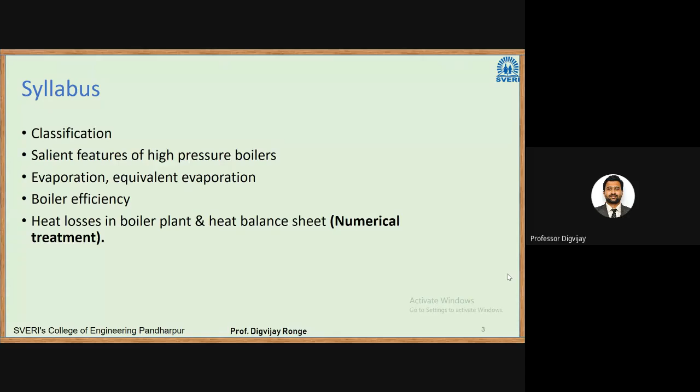So that was about the certification about the boiler attendant or boiler technician.

Okay, now we'll start the chapter. First I will introduce the boilers. The two important areas of application of thermodynamics are power generation and refrigeration. Whenever I say thermodynamics, there will be two things involved: either power generation or refrigeration. Both are usually accomplished by a system that operates on a thermodynamic cycle. For power generation, steam is essential, and in some cases of refrigeration also steam is required.

Air conditioning is not only limited to cooling, it also involves heating. In European countries, the temperature is very low, so they refer to it as a heating system. In that case, they use steam for heating the indoor environment.

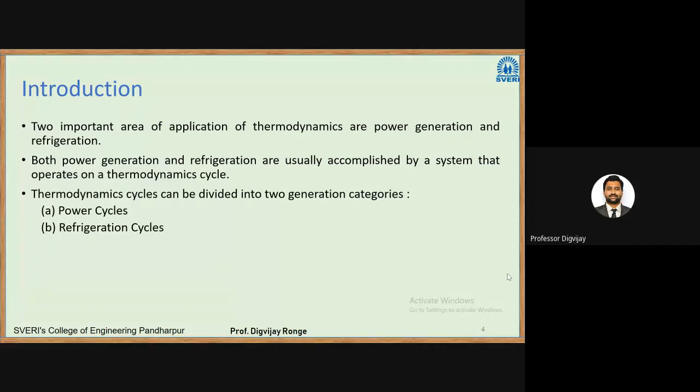Thermodynamic cycles can be divided into two generation categories, depending on the application. If I'm talking about power cycles, we start with the Carnot cycle, which gives maximum efficiency. Then we have the Otto cycle, the diesel cycle, and the Rankine cycle. Second, depending on application, if I'm going with refrigeration, then I have refrigeration cycles - vapor compression cycle, vapor absorption cycle.

So various thermodynamic cycles are involved in refrigeration also.

The devices or systems used to produce a net power output are often called engines. So you are now dealing with the chapter called IC engines. An engine is nothing but a heat engine. You also studied the first law or the second law - the heat engine is nothing but it takes heat from a high temperature source, converts some part of it into useful work, and the rest is termed as heat loss, released to the sink, the low temperature sink.

So devices or systems used to produce a net power output are often called engines. As mechanical engineers, we always deal with engines and refrigerators, and the thermodynamic cycles they operate on are called power cycles - this can be the Carnot cycle, Otto cycle, or diesel cycle. Various cycles exist for power cycles. Next, the devices or systems used to produce refrigeration are called refrigerators, air conditioners, or heat pumps, and the cycles they operate on are called refrigeration cycles.

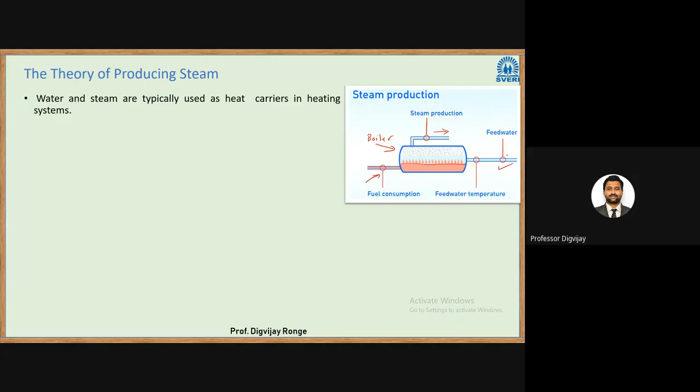Water and steam are typically used as heat carriers in heating systems. It is well known that water boils and evaporates at 100 degrees Celsius under atmospheric pressure, which roughly I will take as 1 bar. So if I boil water under 1 bar pressure, it will be evaporated, or boiled, or converted into steam at 100 degrees Celsius.

Next point: at higher pressure, water evaporates at a higher temperature. For example, a pressure of 10 bar equals an evaporation temperature of 184. What it means is, if I keep the volume constant, pressure will be directly proportional to the temperature. So if I increase the pressure, its evaporation temperature, that is Tsat, will also increase.

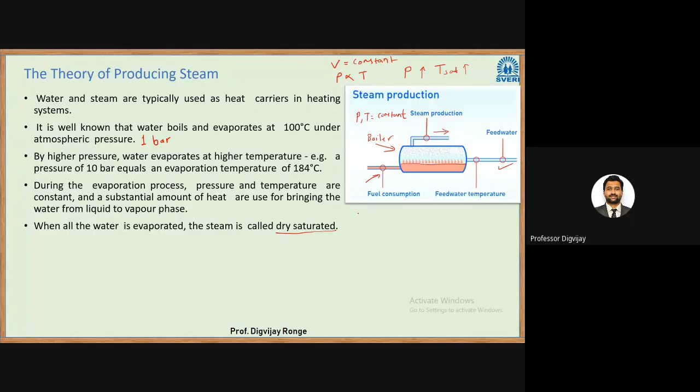So when all the water is evaporated, the steam is called dry saturated. Those who are regular in these lectures, who have attended from the second chapter, can easily identify this situation of dry saturation.

Quickly I will draw this diagram for temperature versus entropy, the diagram for phase change. If I start with liquid and increase its temperature, its entropy will also increase, and at one point I reach the T saturation or saturation temperature. At this point, phase change takes place at constant temperature. This is nothing but the latent heat of evaporation or vaporization. It comes to a point here. At this point, dryness fraction is 0, and here, dryness fraction is 1.

From this point onwards, this situation is referred to as dry saturated. This whole horizontal line is the saturation line. But if you are standing here, this is dry saturated, and this we simply call saturated, or we also call it liquid saturated. From this point onwards, it is converted into dry steam, and now the steam's temperature will again rise. This is the phase change diagram for steam.

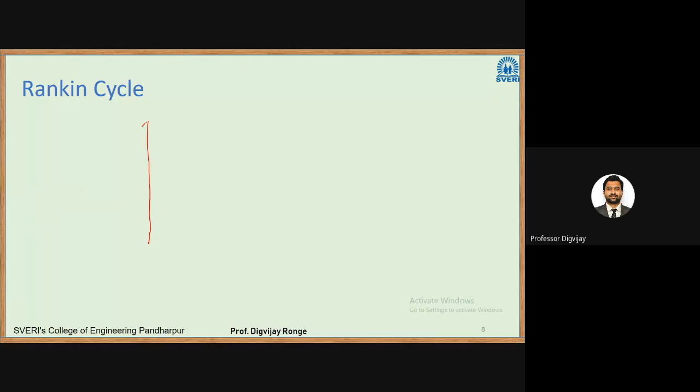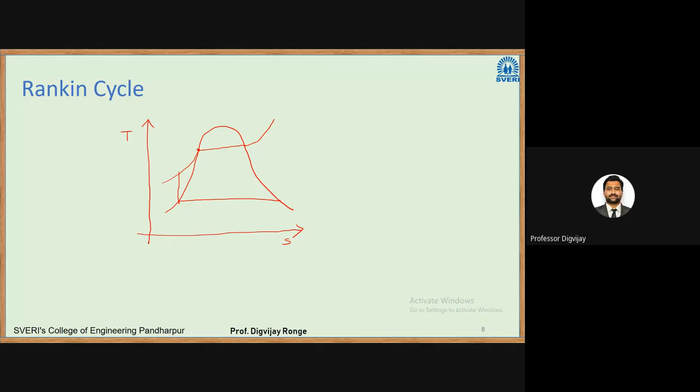If I draw temperature versus entropy, it will look like this. So this is a Rankine cycle here.

This is the 1 to 2 process. Actually, there are two pressures involved: lower is the condenser pressure, higher is the boiler pressure. This pressure is increased with the help of a pump, so this is a pump. 1 to 2 is a pump process. 2 to 3 is a boiler process.

Inside the boiler, first the temperature is increased up to the saturation temperature. Latent heat is added, then it is converted into dry saturated steam. Afterward, it is converted into superheated steam. This is the boiler process, 2 to 3. Next, from 3 to 4, it is an expansion process inside the turbine.

This is an expansion process, a reversible adiabatic process. That is why it is a constant entropy process. Again, 3 to 4, here it is the turbine.

Inside the turbine, work is being produced. Again, 4 to 1 is here the condensation, which takes place inside the condenser. So this is the Rankine cycle.

There will be some numericals for you in chapter 4, that is the vapor power cycle. So draw it.

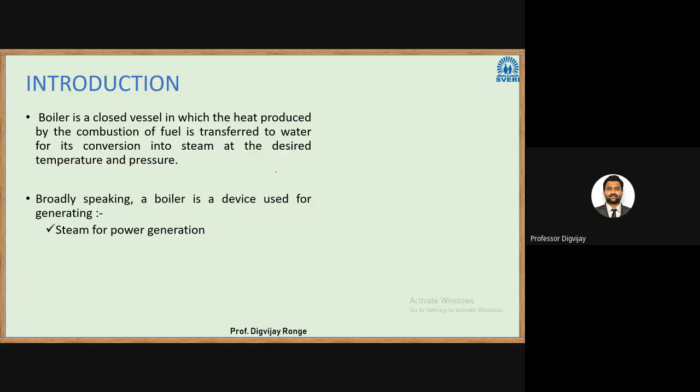water for its conversion into steam at the desired temperature and pressure. I want you to write down this definition. It's very important; it covers all the aspects of the boiler. Boiler is a closed vessel in which the heat produced by the combustion of fuel is transferred to water for its conversion into steam at the desired temperature and pressure.

This term is very important: at the desired temperature and pressure. This desired temperature and pressure will be decided by the power plant engineer, that is, how much pressure should be there inside the boiler and what is the outlet temperature of the steam coming from the boiler.

Broadly speaking, the boiler is a device used for generating, first, steam for power generation. So that is the basic purpose. Boiler is used for steam for power generation. Second, hot water for heating purpose.

Now next, this slide gives you an idea about the applications of steam boilers. First one here, agriculture, then animal food industry, bakeries, ceramic industry, dairies,

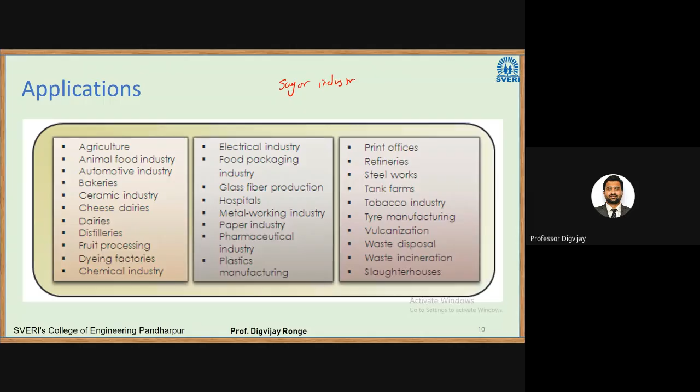And thermal power stations. In both cases, we are using boilers. So if you get a chance to visit nearby sugar industries, please go and watch for boilers. There, the technician will explain how that boiler works or how it is being utilized.

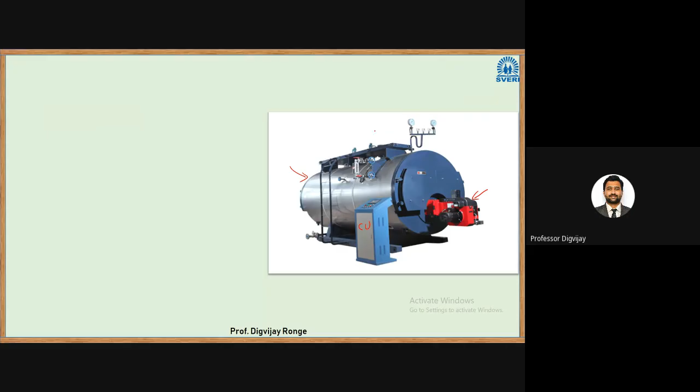So what are the primary requirements of the boiler? The primary requirements of steam generators or boilers are: the water must be contained safely. That means water inlet and water circulation inside the boiler should be contained safely. There should not be any mixing of water with the fire or the combustion part; they should not be mixed together. Then the steam must be delivered safely in the desired condition as regards its pressure, temperature, quality, and required rate. So that has to be controlled very precisely.

Again, the material used for the construction of the boiler should withstand that pressure, right? If it fails to withstand that pressure, it may explode and that may cause very serious casualty inside the thermal power station. So that was the two major objectives.

Now we'll see how boilers are being classified. Below is the classification of boilers. These may be classified under horizontal boiler, vertical boiler, or inclined boiler, depending on their position. Second is fire tube and water tube boilers. So what is a fire tube boiler? What is a water tube boiler? We'll see that in upcoming slides.

Third is externally fired and internally fired boilers. Externally means the combustion first takes place outside, and that heat is then transferred to the boiler. Internally means, like I showed you in the previous image, in that shell only there will be fire and inside that only there will be water. So both will be separated.

Then D is forced circulation and natural circulation of boilers. Forced circulation means some velocity will be imparted to the water. Natural circulation means, like we all know, if I take a bucket or some vessel with water inside and start heating it, the hot water near the base will rise up and come to the top. This happens because the density of hot water is less, so it rises, and the cold water settles to the bottom. That way circulation is created, which we refer to as natural circulation.

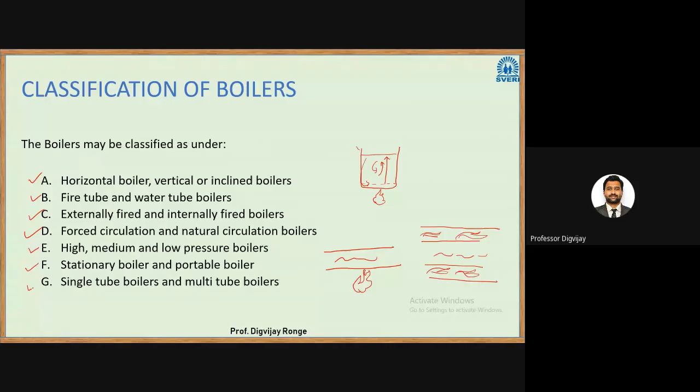First we'll see what is a fire tube boiler. It is a boiler in which the hot flue gases are present inside the tubes and the water surrounds these tubes. As fire is present inside the tubes, hence it is called fire tube boiler.

I will show you the construction, then your idea about this boiler will be more clear. See, there is this image. At the bottom there is a brick structure, made up of brick. Then there is a furnace here where heat is being generated, and to that furnace these tubes are attached.

Inside the tube, this fire or flue gases will flow. These tubes are surrounded by water. Now heat transfer will take place from the tube to the water, then water will be converted into steam, and that steam will be taken out. These flue gases will transfer their heat to the water and will be taken out from the other end. So this simple diagram is in front of you, but the actual construction is a bit more complicated. Please draw that diagram.

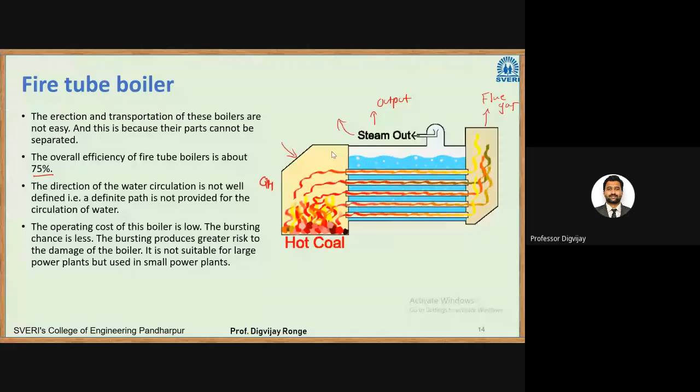So this is about fire tube boilers. Next, we'll see water tube boilers.

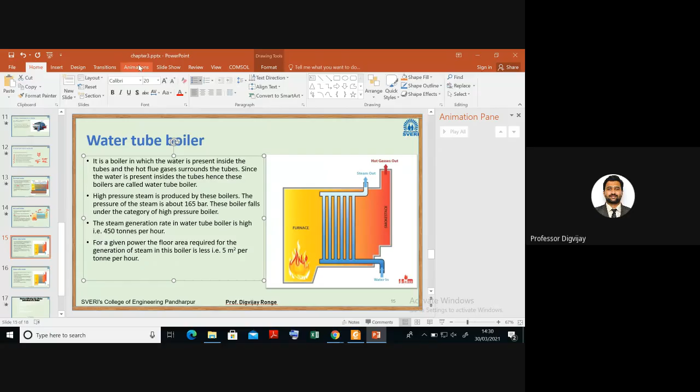Okay, so here it is a water tube boiler. As you can see in the figure on the right side, it is different from what we saw previously in the fire tube boiler. In a water tube boiler, water is present inside the tubes and the hot flue gases surround the tubes. In the previous case, fire and flue gases were inside the tube and water surrounded them. Here it's the opposite - water is inside the tube and flue gases surround it. Since the water is present inside the tubes, these boilers are called water tube boilers.

So draw that diagram. As you can see here, there is a furnace, then there is this pipe circuit. Inside the pipe, water is flowing, then it turns to steam, and the steam is taken out. These hot flue gases are being taken out from this exhaust.

High pressure steam is produced by these boilers. The pressure of the steam is about 165 bar. In the fire tube boiler, the value was only 25 bar, but in this case the steam is produced up to 165 bar pressure. This boiler falls under the category of high pressure boiler. So fire tube is a low pressure boiler and water tube is a high pressure boiler.

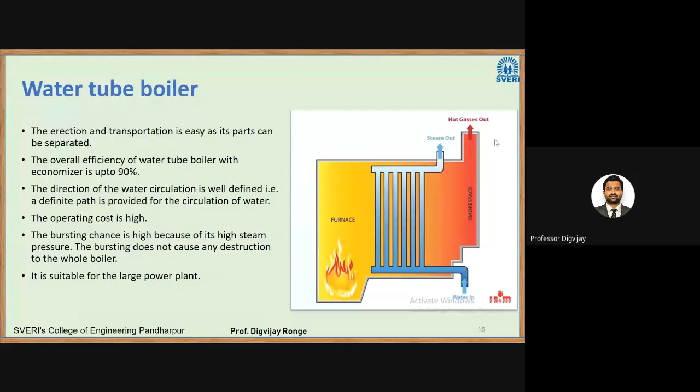Next there is another point here, the factors affecting the choice of the boiler, but we can take this point at the end of the chapter. First we'll see what is the heat balance inside the boiler - how much heat we add, how much steam is generated, what is the heat balance sheet we have to draw for the boiler. This heat balance sheet is very important; it is a standard procedure for calculating the performance inside the boiler.

But I think this is sufficient for today's lecture. I have covered a lot of theory today. In the next lecture we'll see the numerical part.

So as a homework, I want you to go online search, or you can read the books for fire tube versus water tube boilers, and then you have to differentiate. There will be numerous points. Like, efficiency is 75% efficient here, 90% there. Then operating cost is low here, operating cost is high there. So likewise, I want you to write down as many differences as you can.

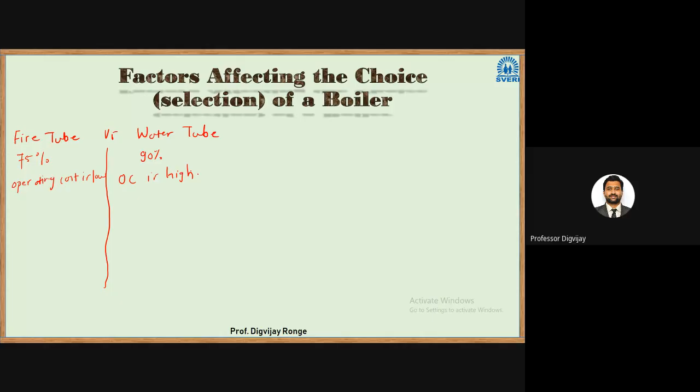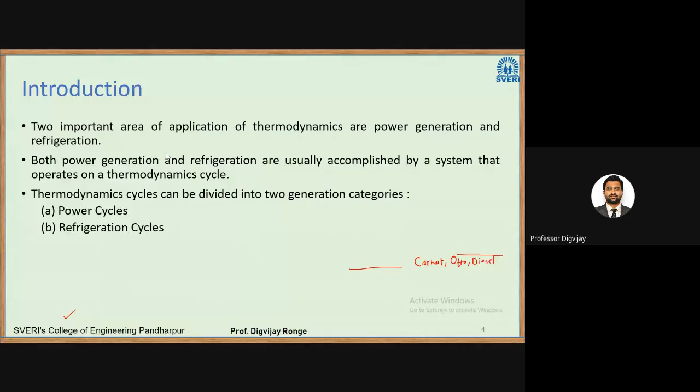Okay, so those who came late, please see here. We are in this third chapter, performance of boilers. This was the syllabus. Then I told you that whenever we say thermodynamics, it deals with both power generation and refrigeration. For power generation, we have various cycles: Carnot cycle, Otto cycle, diesel cycle. For refrigeration, we have VCC cycle, VAS cycle.

Then we have seen how this steam is being produced. We saw that for 1 bar, the temperature is 100 degrees Celsius. But if I increase the pressure, let's say to 25 bar, the temperature will be higher than 100 degrees Celsius. I explained this with the help of one phase change diagram.

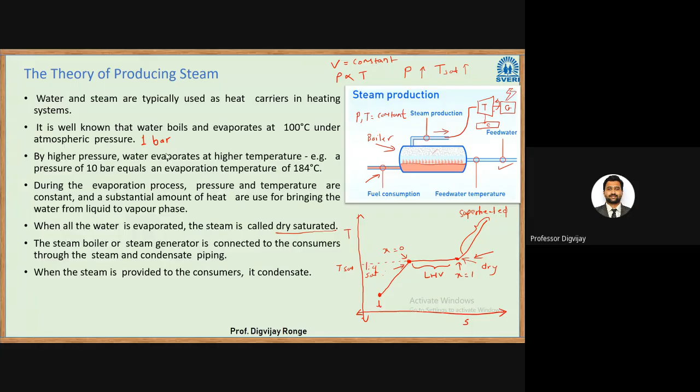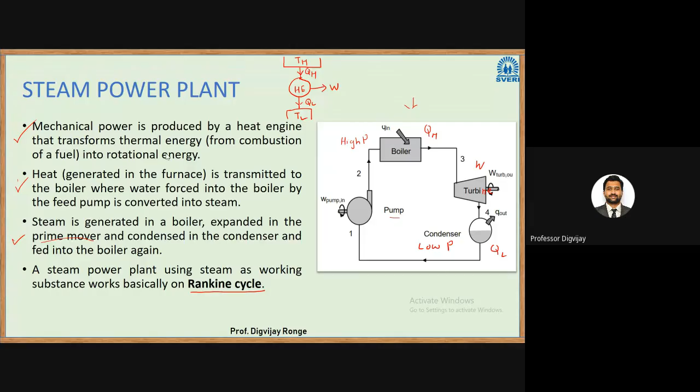So before going to the actual part, that is the boiler, we studied the steam power plant. There are 4 major components involved here: boiler, turbine, condenser, and pump. Then we have seen the detailed schematic diagram here. This was the detailed schematic diagram.

Then Rankine cycle, I have given you an idea because you are going to study in chapter number 4, vapor power cycles, where you are going to solve various numericals related to the Rankine cycle.

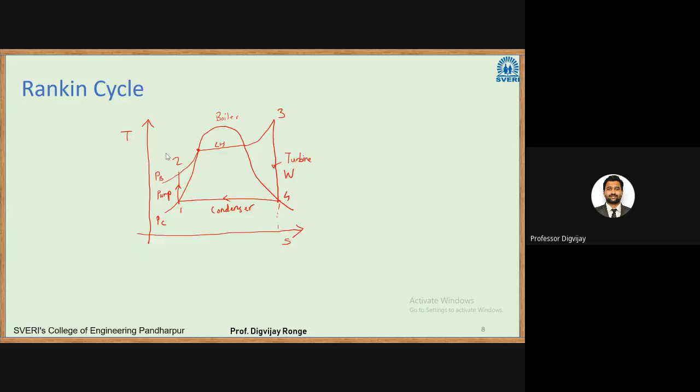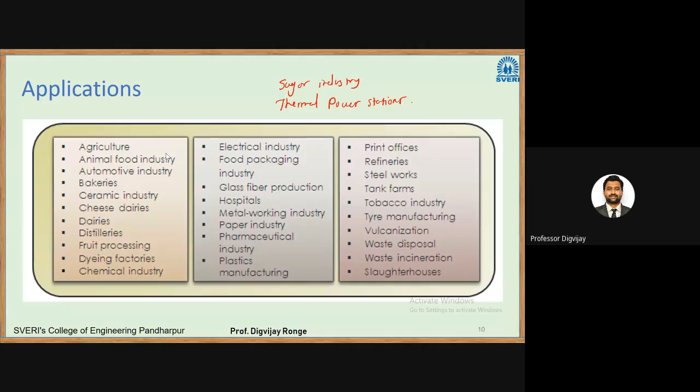Then in the introduction part, I have given you the purpose or objective of a boiler, that is steam generation and hot water production. These are the applications, and numerous applications are there. Each application represents a big industry. If you go for plastic manufacturing, or pharmaceutical industry, these are very big industries, multi-billionaire, millionaire companies are there, and they also require a boiler. I also told you that this chapter, here it is one chapter, but it is a whole big subject, boiler. That also you can see.

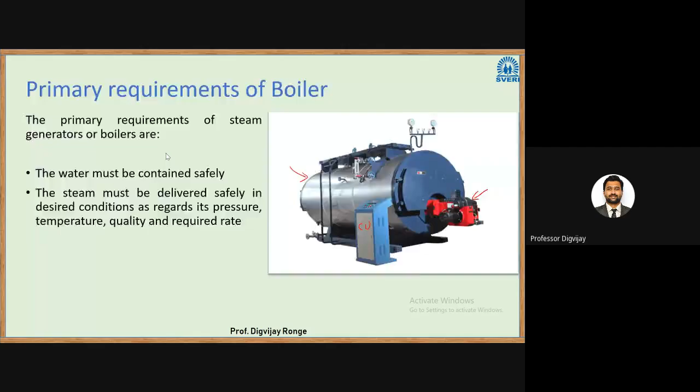This is one commercial boiler, shown here. Then we have seen the classification of boilers.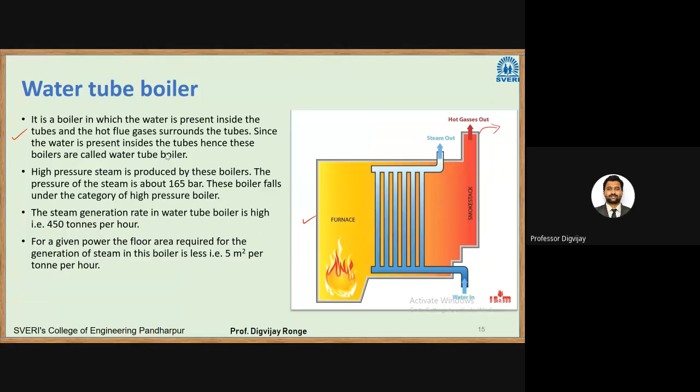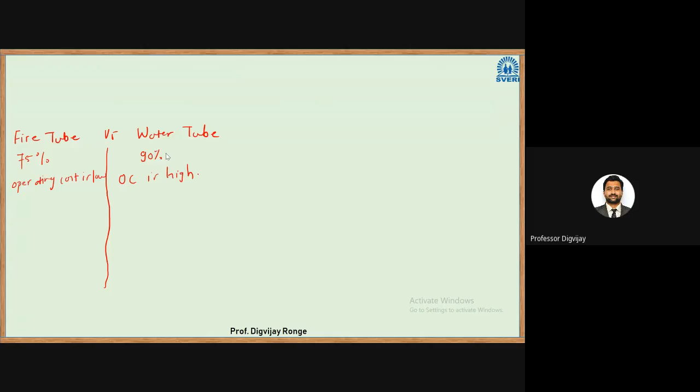And then was the water tube boiler. Inside the water tube boiler, what happens? Water flows inside the tube and flame or the flue gases surround it. So as part of homework, I have given you this: differentiate between fire tube and water tube boilers. So as a closing, I will show you one animation available on YouTube about fire tube boilers.

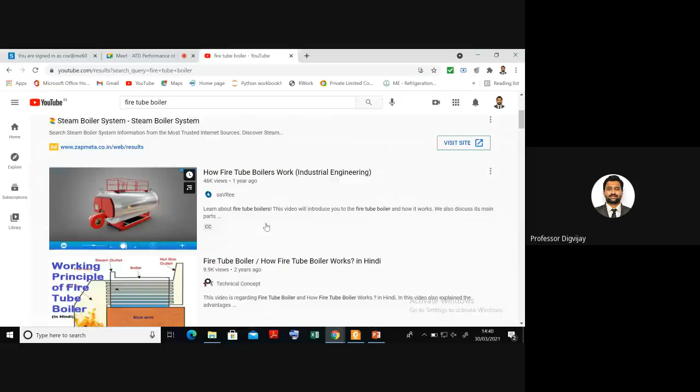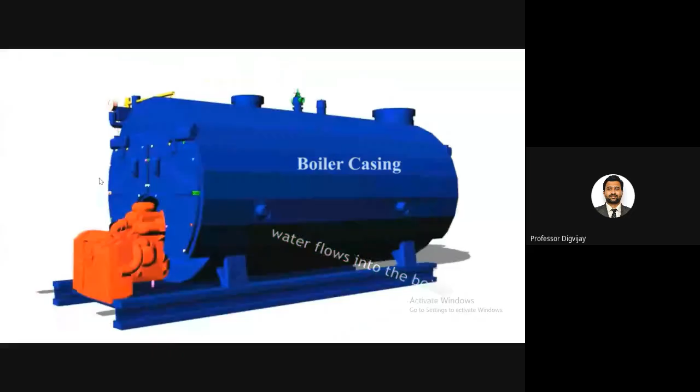This is a fire tube boiler. Its animation is being shown here. So there is boiler casing, water flows inside, so there is a water inlet. Then there is a steam outlet at the top. There is this air draught fan.

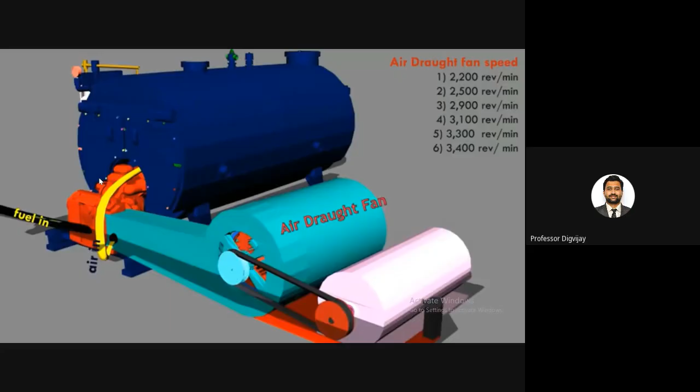It supplies the air. So why is air needed? Only fuel is not sufficient, as you might have studied in IC engine. For fuel, it needs air or an oxidizer. Air is being supplied inside. Then there is a fuel line. Fuel is supplied inside, and air and fuel mix together.

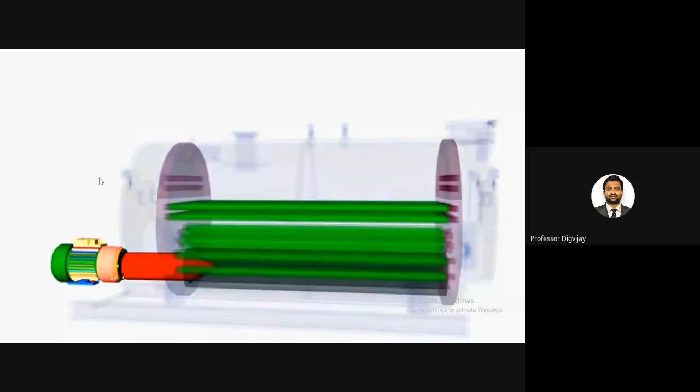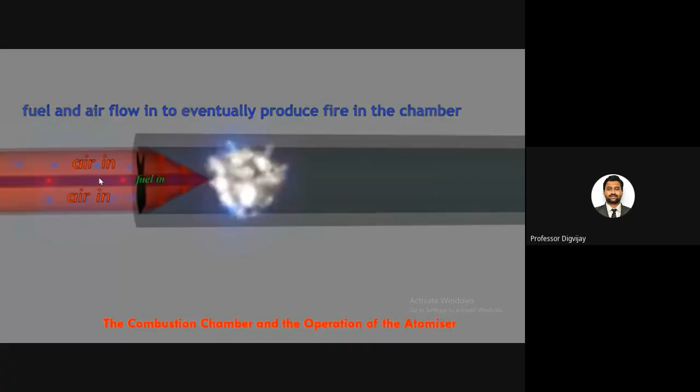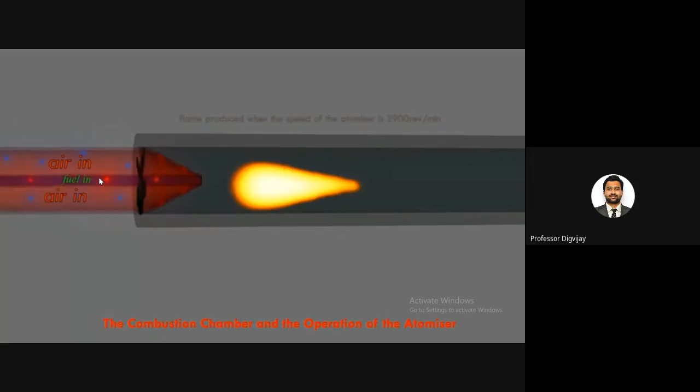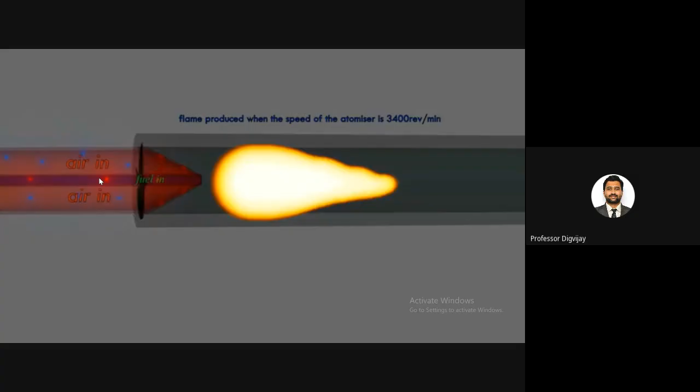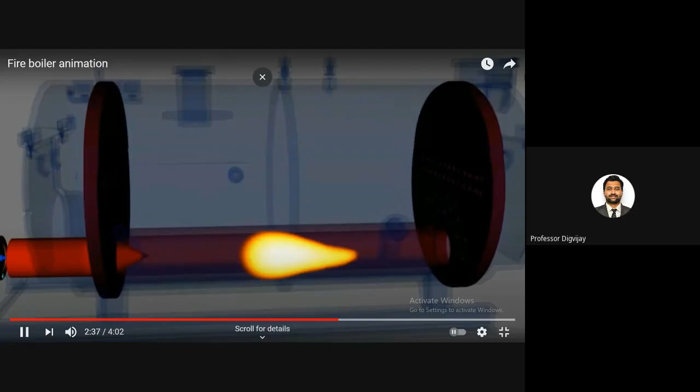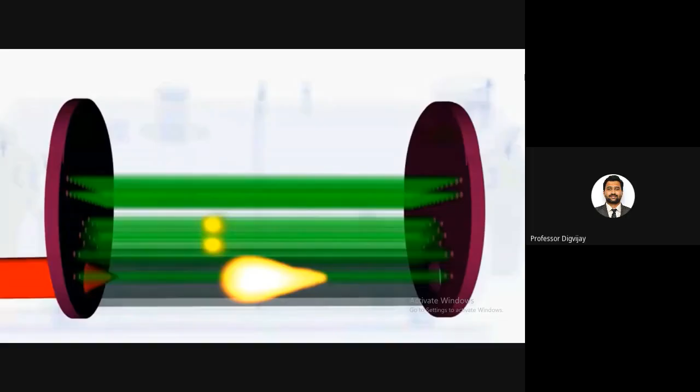So see here, these flue gases are now passed inside the tubes. It is being passed through the tubes. Water is surrounding those tubes. Water will gain the heat from the flue gases, and that water will convert into steam.

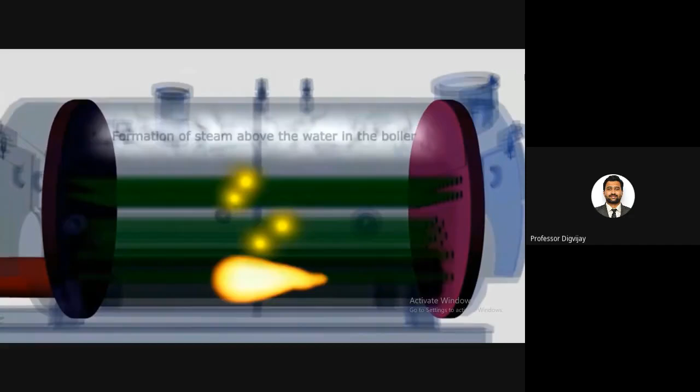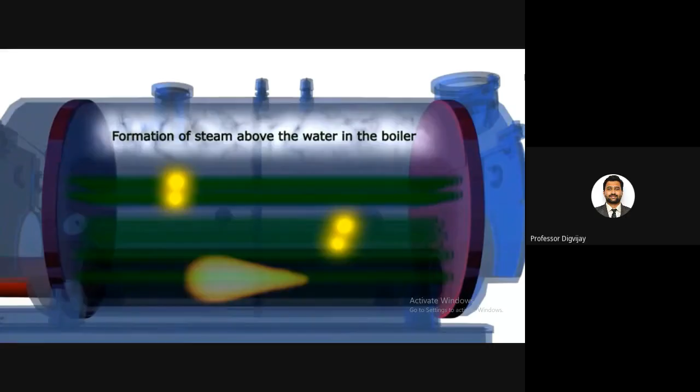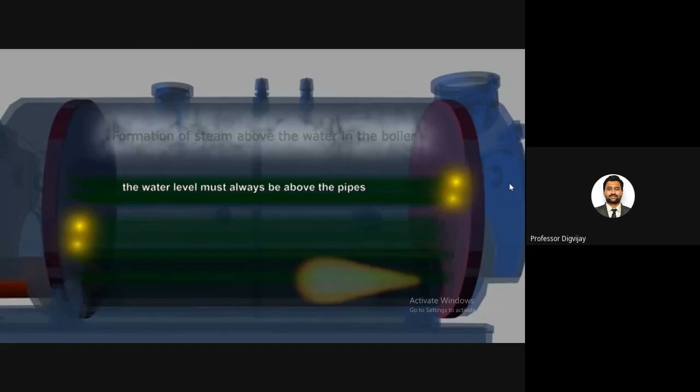Formation of steam above the water in the boiler, the steam is being produced. Water level must always be above the pipes, so that level of water has to be maintained above the pipes. So that steam is taken out from the steam outlet, and this smoke out is the exhaust for the flue gases.

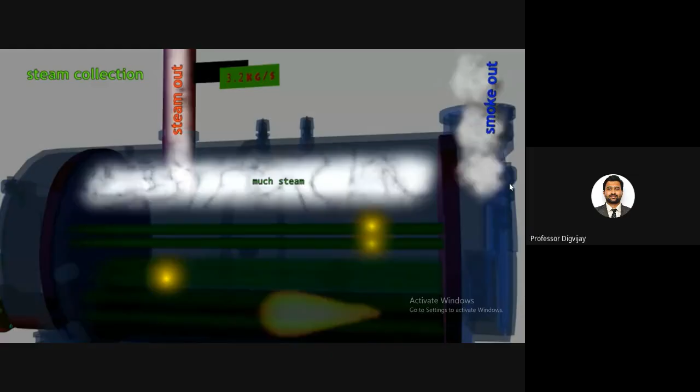So likewise, there will be another video for the water tube boiler. Inside the water tube boiler, the difference is the water will flow inside the tube and fire will be outside, right? Okay, so if you have any doubts up to this point, you can ask.